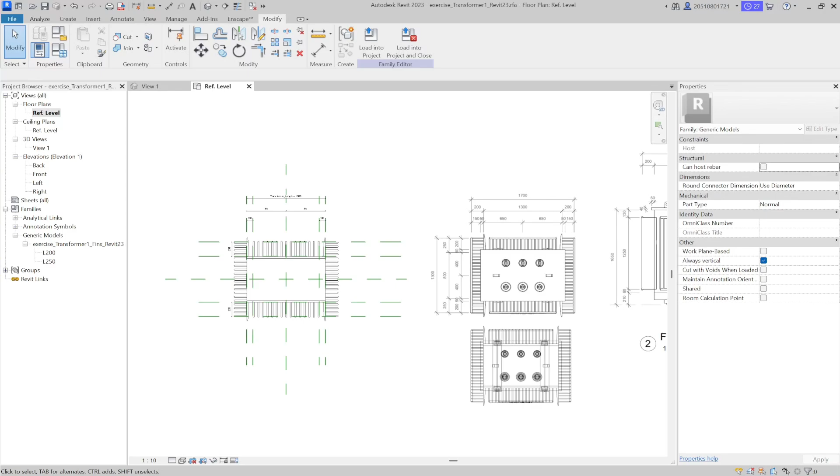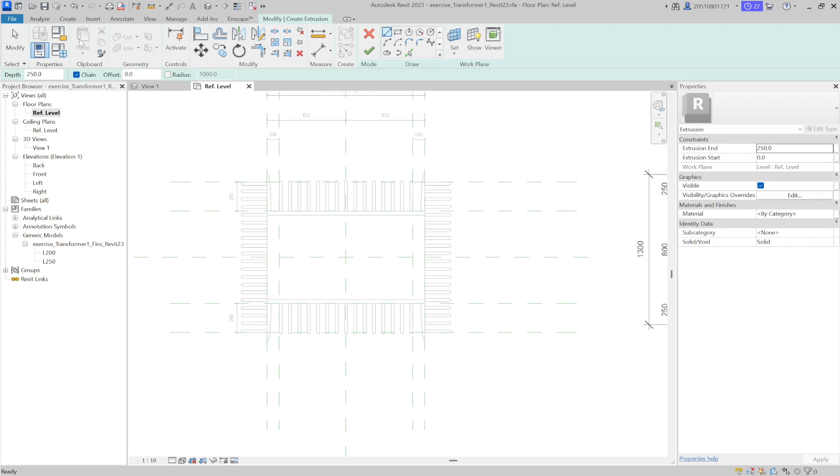Next, we'll create the auxiliary components, starting with the top panel. Take a look at the reference image. The outer edges of the top panel are offset 50 mm from the transformer body, and its thickness is 40 mm. Go to the reference level and use the extrusion tool to draw a rectangle. Set the offset to 50 and snap the corners to the transformer body.

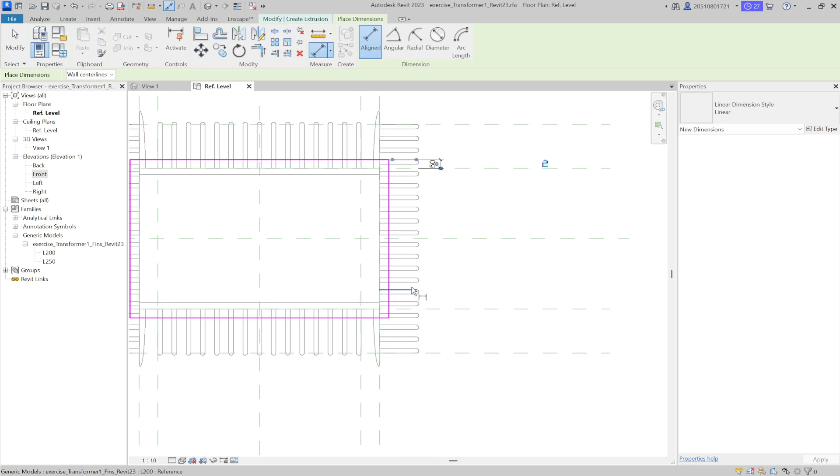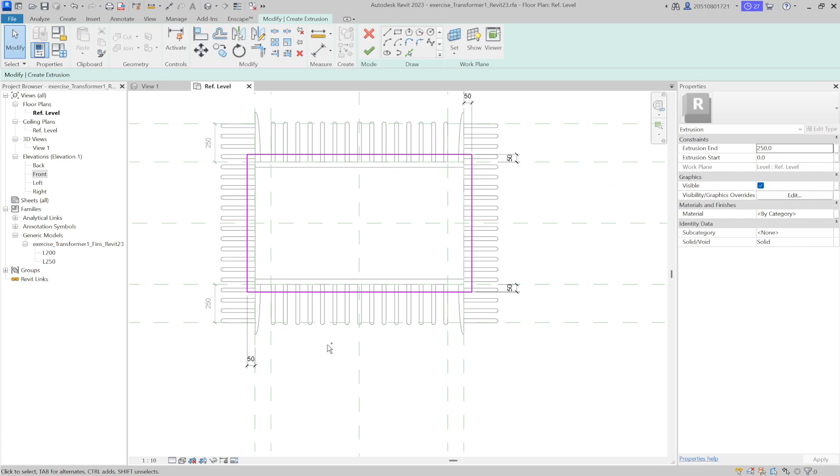Then use the dimension tool to measure each offset distance from the reference planes to the outer edges and lock them. Click Finish to complete the extrusion.

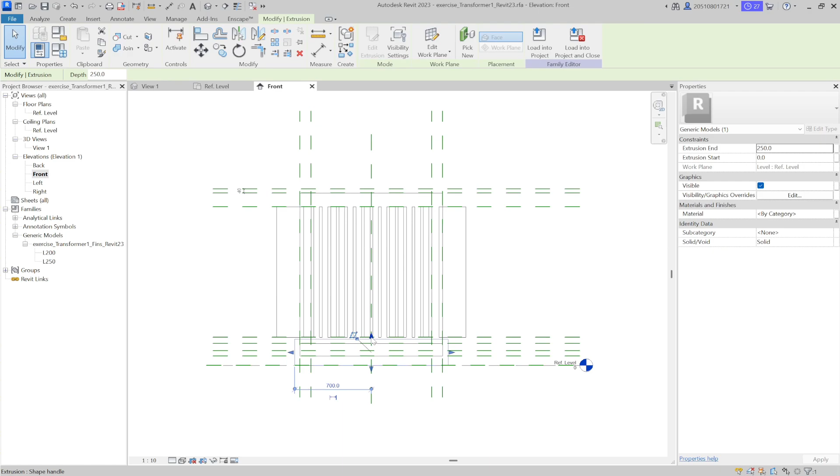Next, switch to the front view and move the top panel upward. Create a new reference plane, align the panel to the planes, and measure the distance between the two planes. Set this distance to 40 mm, then lock it in place. That completes the top panel of the transformer.

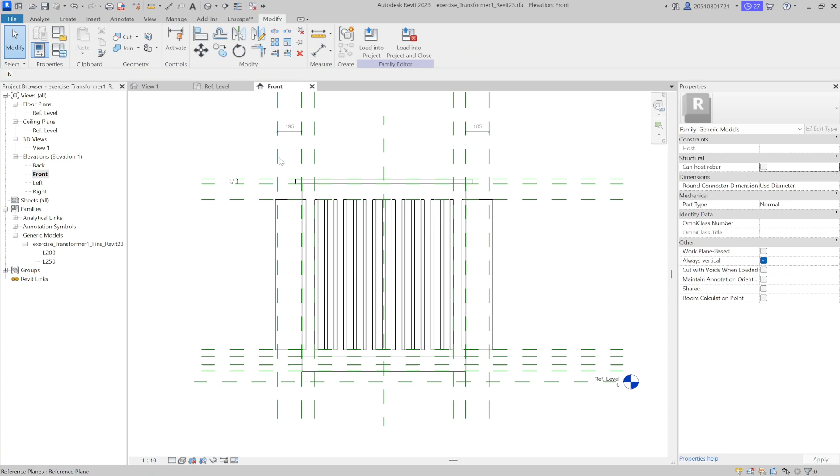Now let's move on to the fin reinforcement bars. In the front view, you'll see two reinforcement positions, one at the top and one at the bottom of the fins. Create a new reference plane to define the center of the cylindrical bar. Measure the distance from the transformer body to the bar's center, 200 mm for the L200 fins, and 250 mm for the L250 fins.

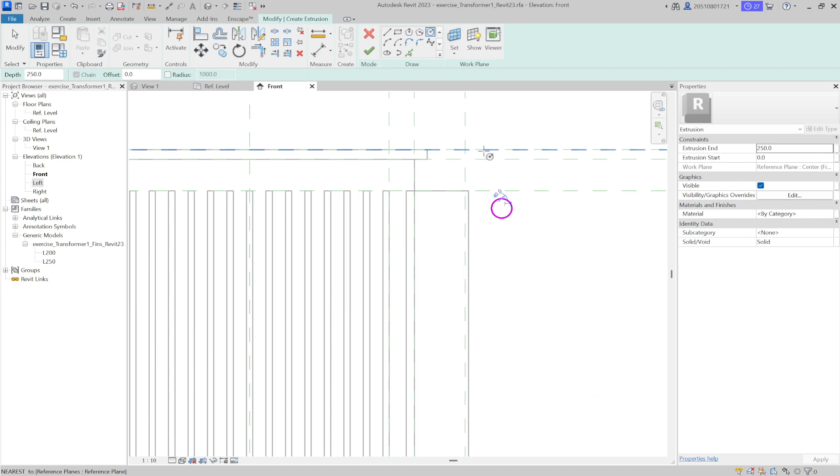Once the center is set, use the extrusion tool to draw two circles. Turn on center mark visible and align both circles to the reference planes. Remember to lock them.

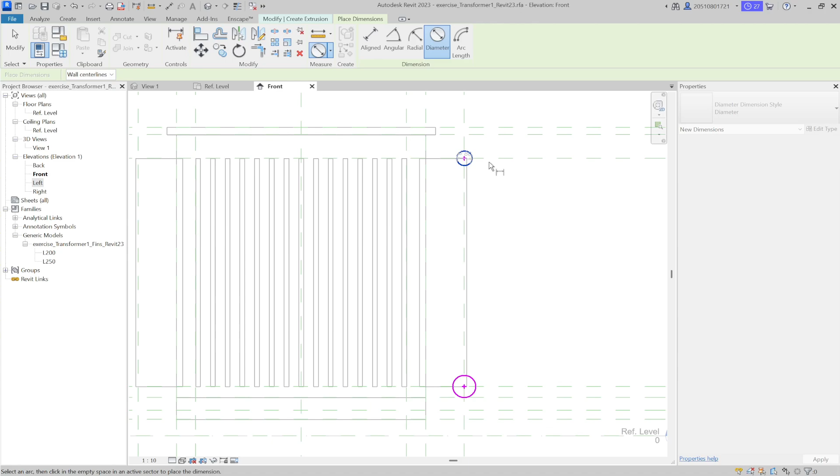Use the diameter dimension tool to define their sizes. Since these bars are permanent family elements, you can manually adjust their radius. No need for separate parameters.

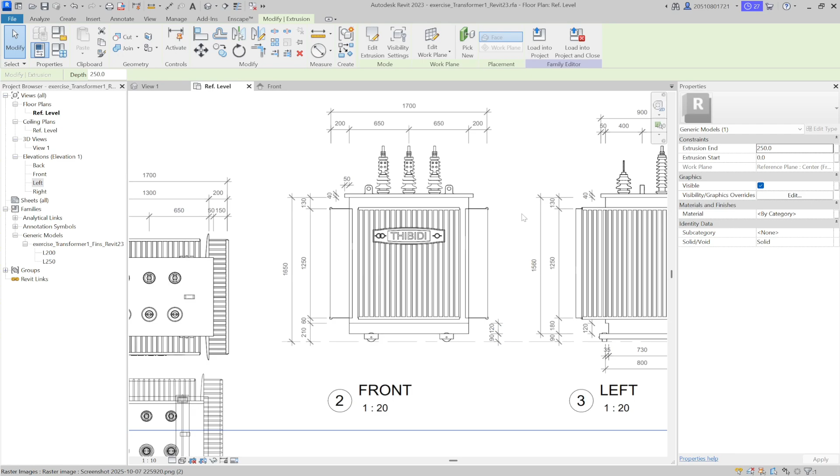Click Finish, then return to the reference level and align each side of the cylinder with the reference planes. Repeat the same steps for the L250 fins.

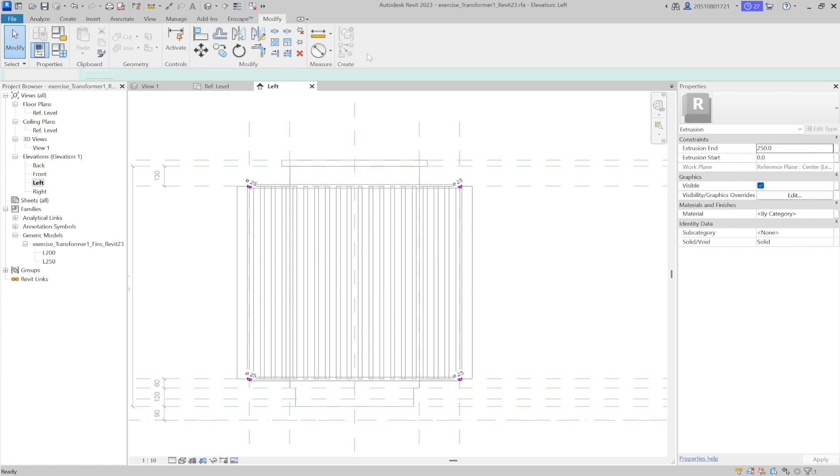Finally, insert all the nested families into the transformer. These include the bushings, nameplate, lifting lugs, and roller stands.